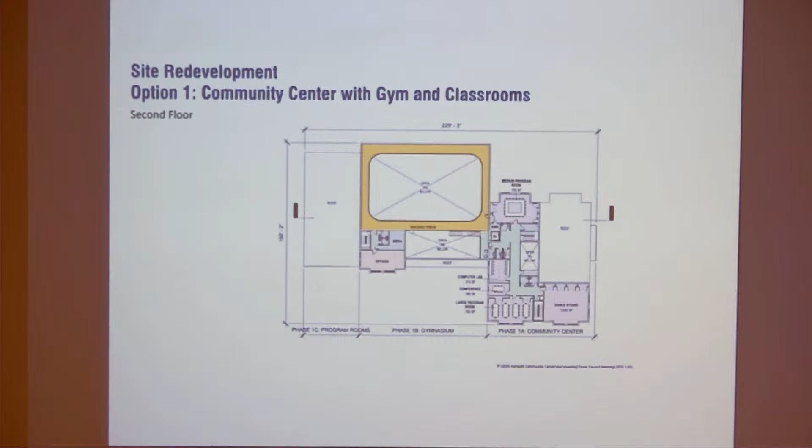Anyone have questions on the plan so far? I realize they're kind of hard to read on the screen. Go for it. Your program rooms are obviously oriented differently in each version.

What if you wanted version 1, and then wanted to be able to accommodate the additional buildings after? So if I understand you, you're saying... one version eliminates the other? Yes, you're either doing the program rooms in option 1, or the pool and program rooms in option 2. So if you wanted to do the program rooms first and then the pool—no, I'm saying one eliminates the other, you either have to pick one or the other. That's correct. So one flaw of these two concepts is that you couldn't build the program rooms first and then the pool, but we can certainly look at designing it so that we can do that.

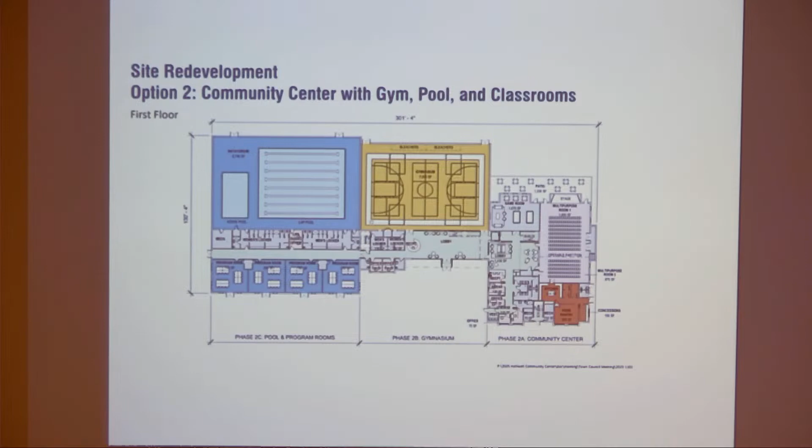Did you look at taking the program rooms and putting them to the right of the community center? No, I actually didn't look at that. I certainly can.

I'm just saying that because there's been some discussion within the community as to what the building could and should be with regard to the multi-generational center. In part of those discussions, there are two separate groups—you've got a senior group, and other generations, I'll refer to them as. Apparently each one would like some dedicated space. So some version of this building could be that community center—what you're looking at appears to be set up similar to a conventional, smaller senior center. If you were to take those rooms and put them maybe to the right, or even adjacent to the left if the gymnasium wasn't there, that could possibly be used for scouts or other functions, for the other generations that would not be seniors, for their programs.

Yeah, I think it's definitely worth looking into. I think the motivation for these two concepts was to have something that was easily priced—in other words, two schemes that were kind of plug and play, so you could easily itemize all the different components of the overall center, to facilitate pricing.

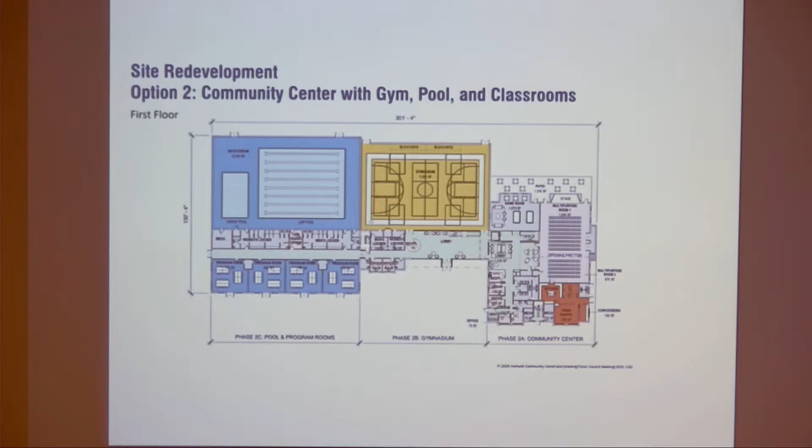Just a question I've got—I don't see a community center and a program room as an option here. Yes, that's what he was getting at. I think that would be something we want to include, and I agree, because that could be phase one. That way you've got the 4 program rooms and the community center pulled off of the gym, a good center which would accommodate multi-generational and senior programs. I think that's something we should have, and we don't have it here yet.

That's a good point. So I think this is the extent of the plans—there's a summary slide on the next slide. Oh, forgive me, second floor—second floor is the same as the first version, so we can keep on going.

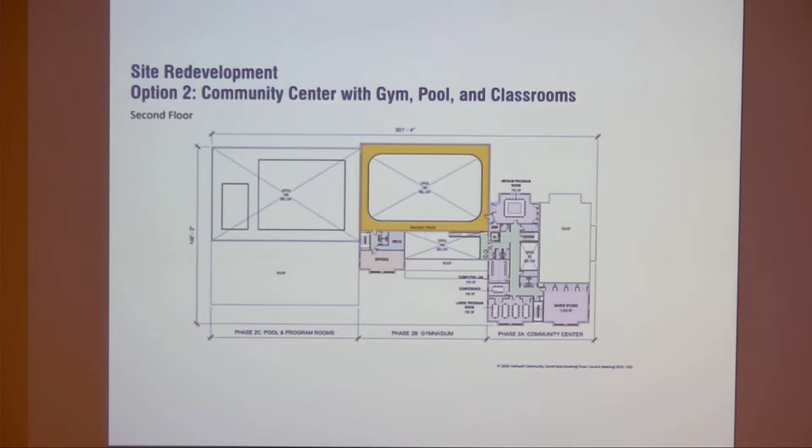Just a summary of the revisions we made that I spoke to earlier: flipping the building, moving food services to the corner closest to the fields, eliminating the second Lula—that's a special kind of elevator meant to go only one floor, so we eliminated that second elevator. We also enlarged the locker rooms, and looked at the facade to make it a little more modern than what we'd shown previously.

You had mentioned the kitchen concession earlier—are you designing it to be dual purpose, so it can be a concession accessible from the outside in case there's outdoor recreation there? I just wanted to make sure I read it correctly. Every earlier scheme had a concession stand of some type—one was a freestanding booth near the fields, another was associated with the gym phase.

But when we understood the community center would most likely be built first, it made sense to find space within that phase, taking advantage of already having a commercial kitchen. So is the kitchen adequate for congregate meals? Yes. Is it certified and licensed? Yes. To define: a commercial kitchen is generally understood as sanitary from the Board of Health's point of view—they sign off on it—as well as sized for the capacity of larger groups. This kitchen satisfies both requirements.

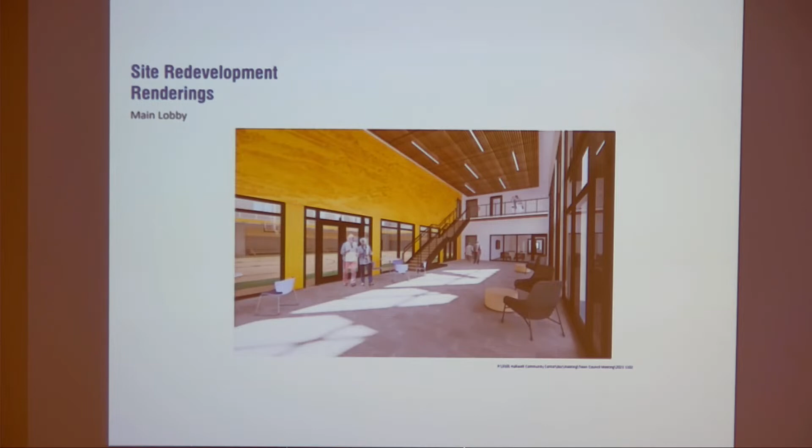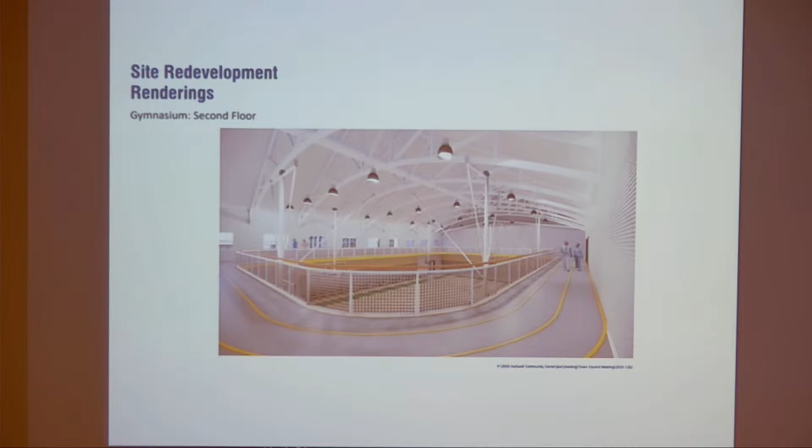This is my favorite slide, no negative feedback. This is the lobby for the senior center, community center space. It also has its own double height space with lovely natural light coming in through a skylight. This is basically you standing right outside the multipurpose room looking back towards the lobby, or the foyer for the gym, looking through those windows we saw in the other rendering. You can see the living room space with a fireplace, TV, and soft seating, and additional cafe seating. It's almost like an atrium.

Next, this is the pool. As I mentioned, it has two pools: a larger lap pool and a smaller one for kids and the general public. I don't know if Joel has ever gotten to this, but I think all three of his daughters did competitive college swimming, so he's very particular. The first thing he said when he looked at this rendering was, 'there's glare, you have to fix the glare.' I reminded him it was facing north, and the light just wasn't positioned correctly in the rendering. He was like, okay.

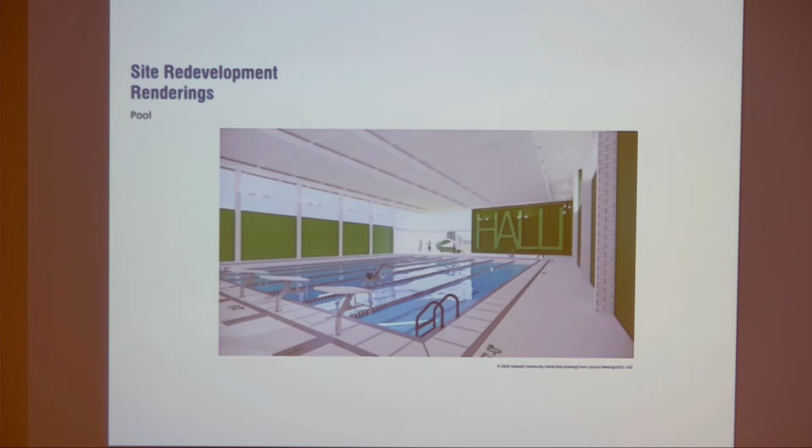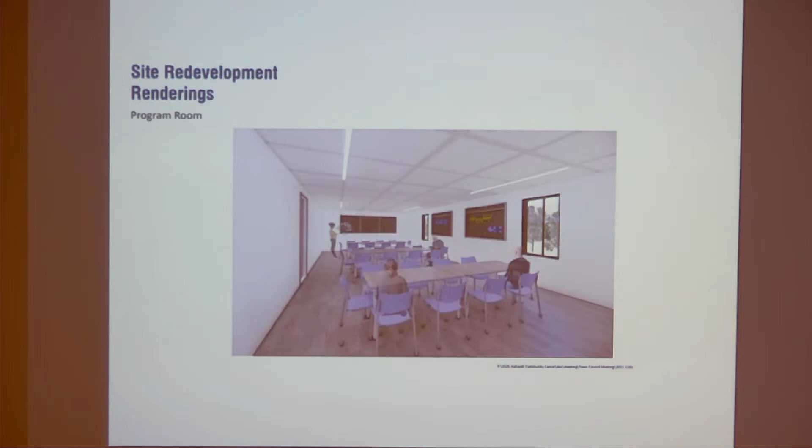Next, this is just a typical program room, to give you a feel for what these, we can call them classrooms or program rooms, look like. They're very multifunctional. This one shows tables and chairs. The flooring could have a spring or cushion to it, so this room could be used for both classes and more physical activity, gross motor stuff. So a lot of flexibility with these spaces.

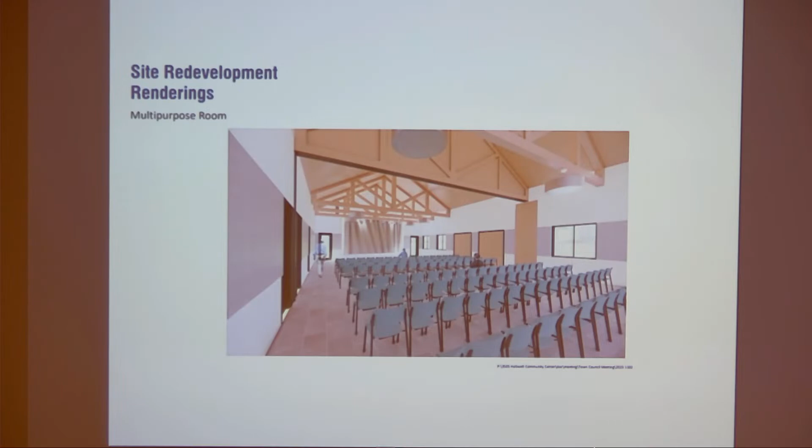Then you can see the stage in the back. Yeah, okay, you want to go into it?

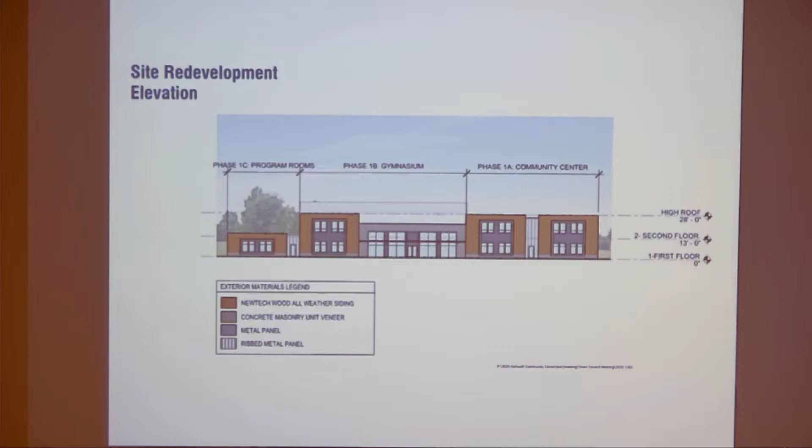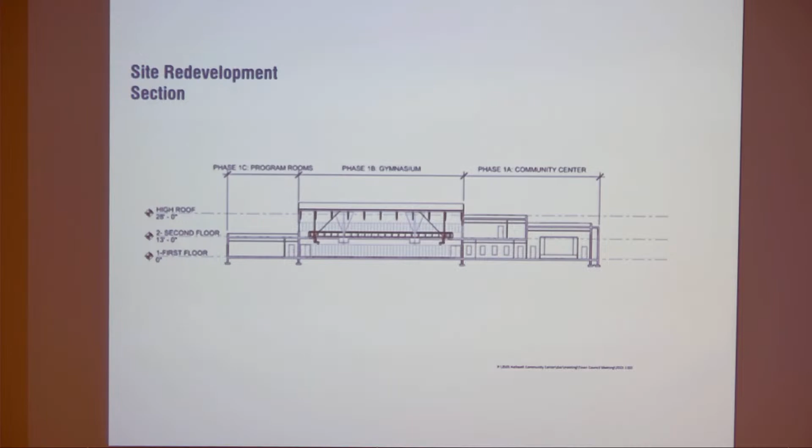All right, so then on to the site plan. You can go to the next one.

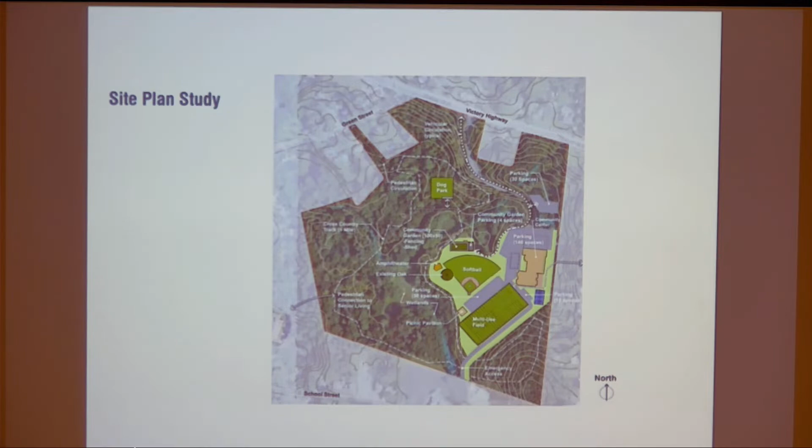So the rest of the presentation concerns schedule and the cost estimate. Let me grab a packet so I can talk to that. We did a schematic design cost estimate, which is really the first type of estimate that goes beyond simple square footages. Good, awesome. All right, if you want to go to the next slide, that's great.